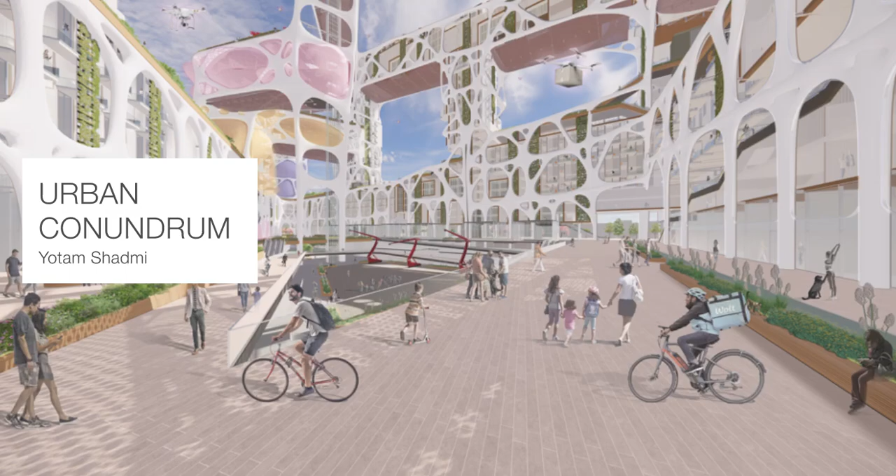When we think about the cities of the future, many of us envision utopian or dystopian scenes, visions where anything imaginable can come to life.

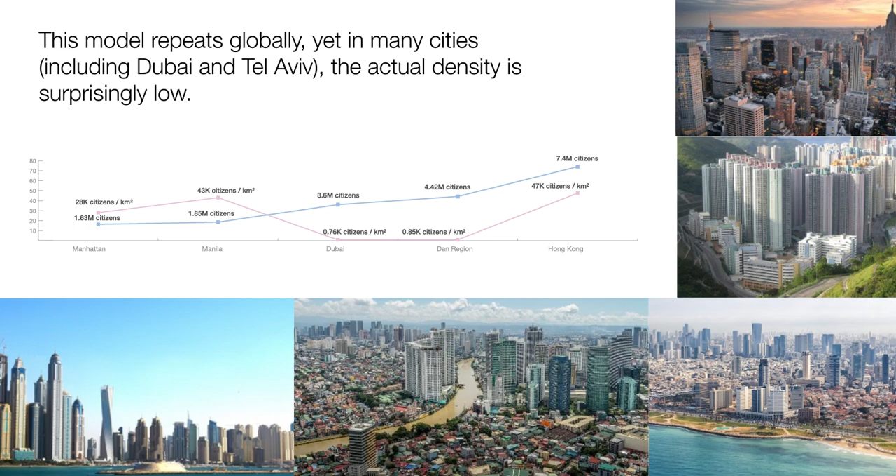Ultimately, we see how skyscrapers are built solely connected to the ground floor to achieve high density. This model repeats globally, yet in many cities, including Dubai and Tel Aviv, the actual density is surprisingly low.

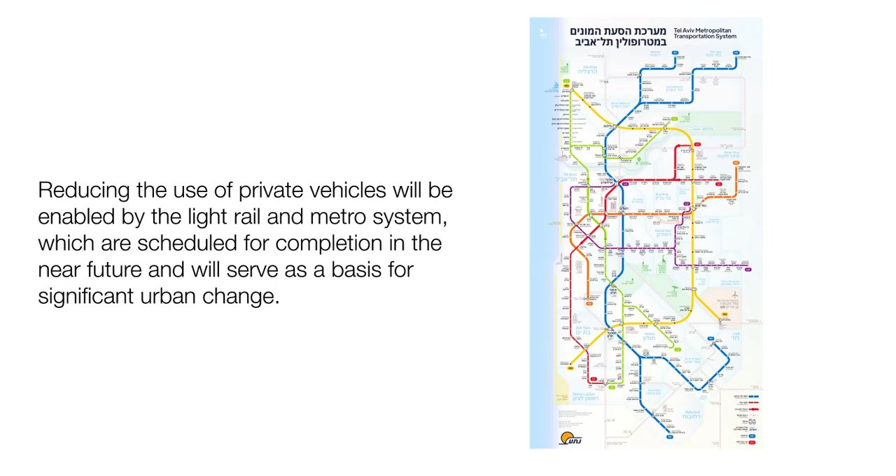Reducing the use of private vehicles will be enabled by the light rail and metro system, which are scheduled for completion in the near future and will serve as a basis for significant urban change. In central Tel Aviv, the highest concentration of stations will be built, through which 4 out of 6 metro and light rail lines will pass.

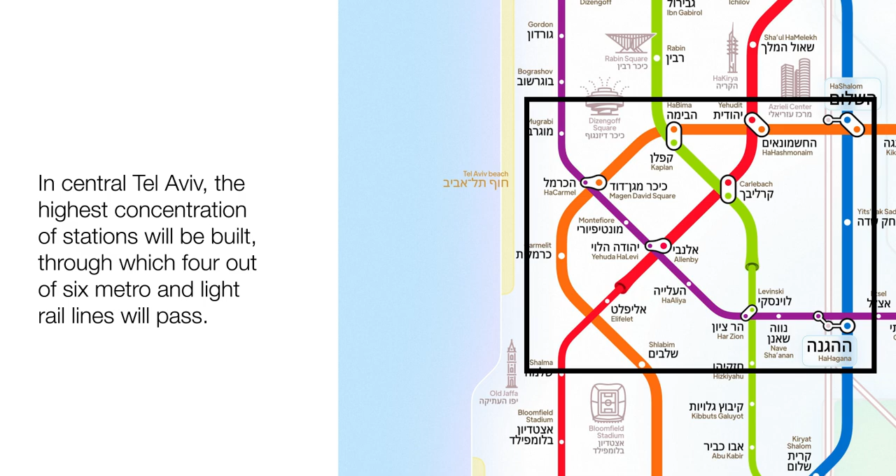The new train system brings up questions about the relationship between the city's ground and underground levels, and the amount of underground parking that currently exists.

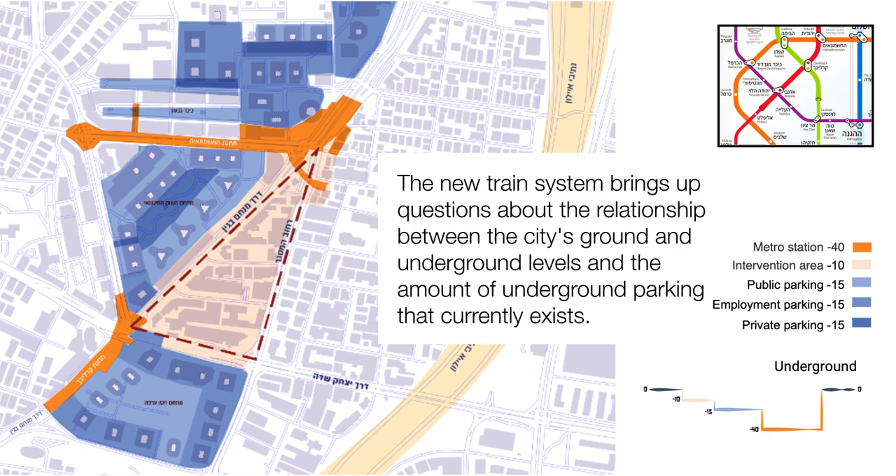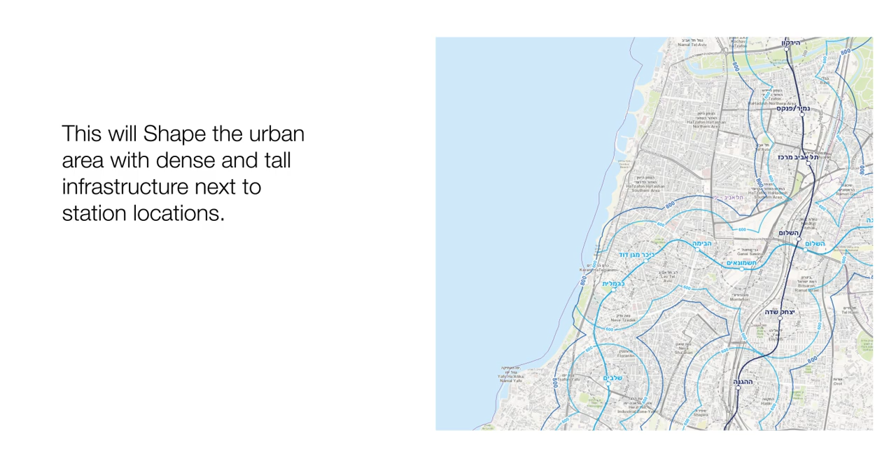According to a national master plan, the quantity and height of constructed mass throughout the city are undergoing significant changes. This will shape the urban area with dense and tall infrastructure next to station locations.

It is suitable for architectural experimentation because it meets 3 central components: proximity to urban centers, high concentration of accessible public transportation, and being up for significant changes in its building volumes.

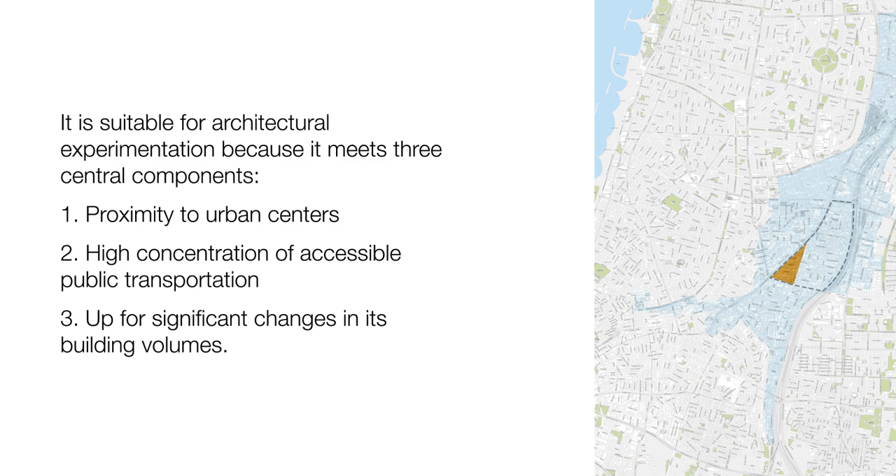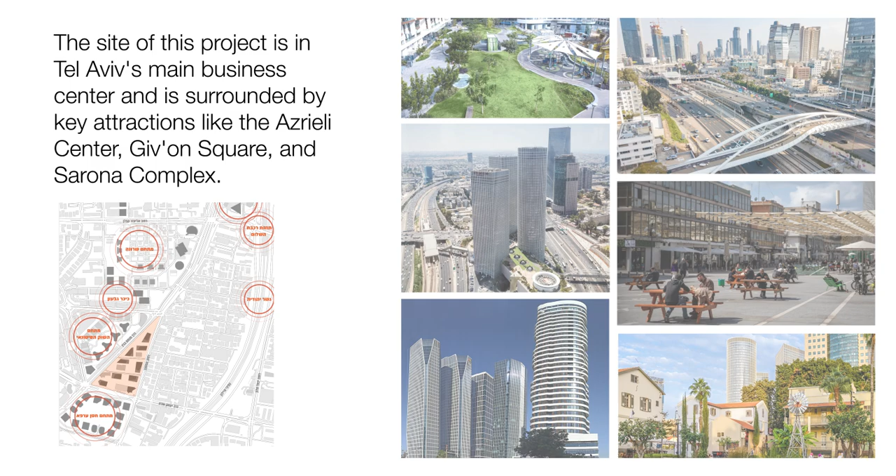The site of this project is in Tel Aviv's main business center and is surrounded by key attractions like the Azrieli Center, Giv'on Square, and Sarona Complex. It is also planned to be highly accessible by various public transportation means with very high frequency.

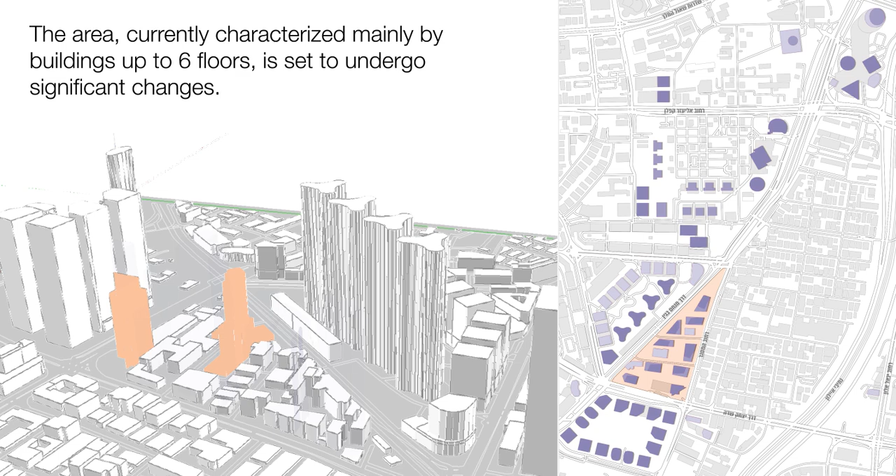The area, currently characterized mainly by buildings up to 6 floors, is set to undergo significant changes, to a construction height of between 20 to 40 floors and multiplying its building volumes by 5. Approximately 3,000 people are expected to pass through it per peak hour.

These factors provide an opportunity to create a different urban model. Now, let's try to think about public space differently, somewhat like the futuristic movies we saw at the beginning.

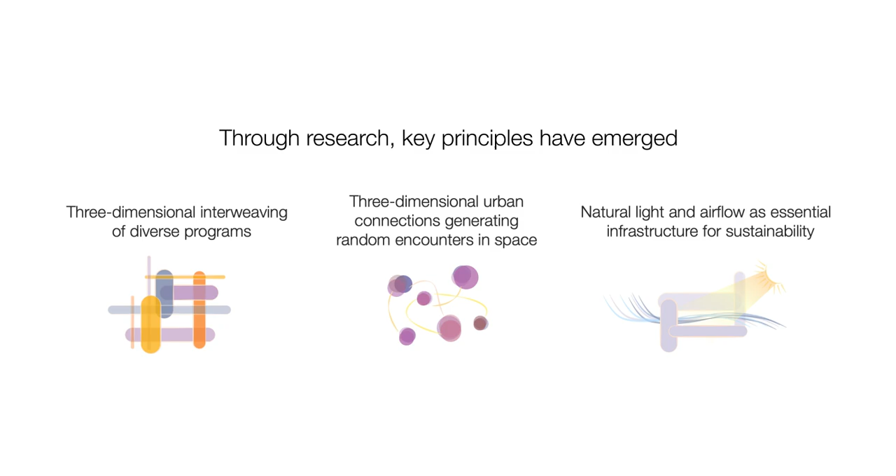Through research, key principles have emerged: 3-dimensional interweaving of diverse programs, 3-dimensional urban connections generating random encounters in space, and natural light and airflow as essential infrastructure for sustainability. These principles aim to create a vibrant urban environment that enhances both functionality and human experience sustainably.

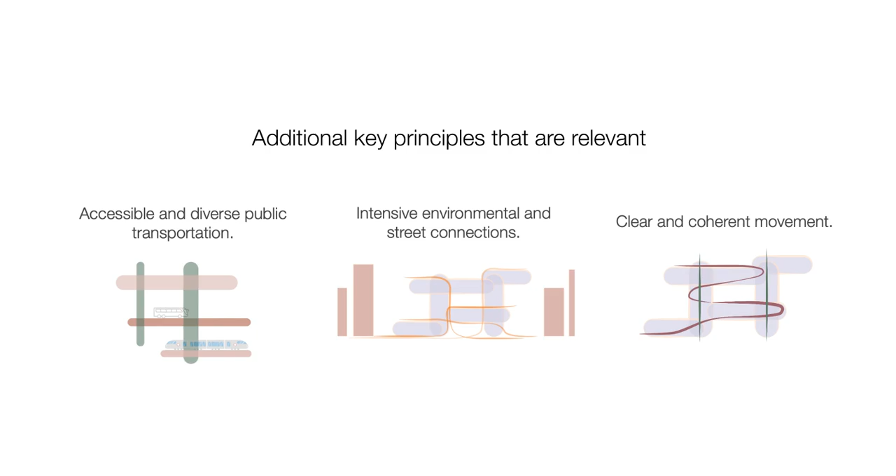Additional key principles that are relevant are accessible, diverse public transportation, intensive environmental and street connections, and clear and coherent movement. The project aims to integrate multi-layered public spaces beyond street level, accompanied by diverse public services, while maintaining a high density that considers all these criteria.

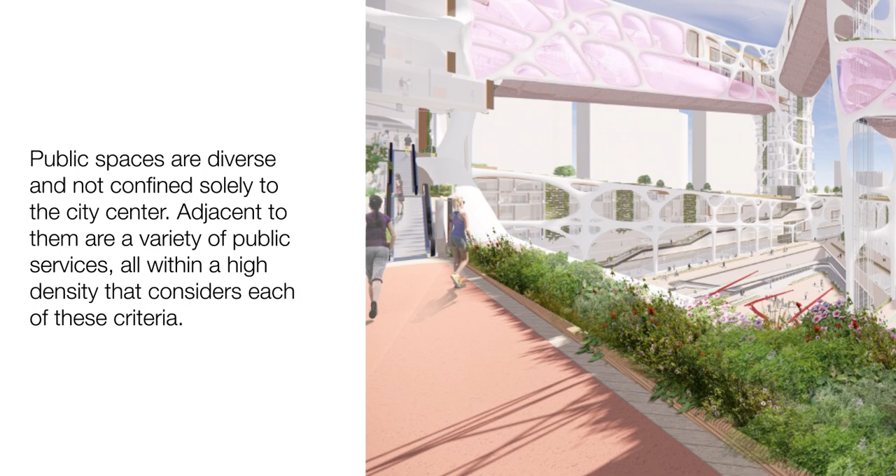Public space key principles are layering of public space, diversity of public spaces, and high-density development while preserving public spaces for all. Public spaces are diverse and not confined solely to the city center. Adjacent to them are a variety of public services, all within a high density that considers each of these criteria.

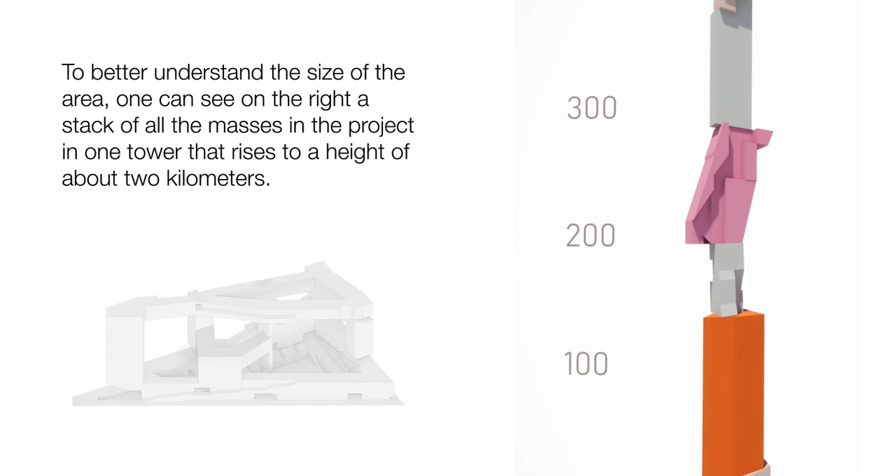To better understand the size of the area, one can see on the right a stack of all the masses in the project in one tower that rises to a height of about 2 kilometers.

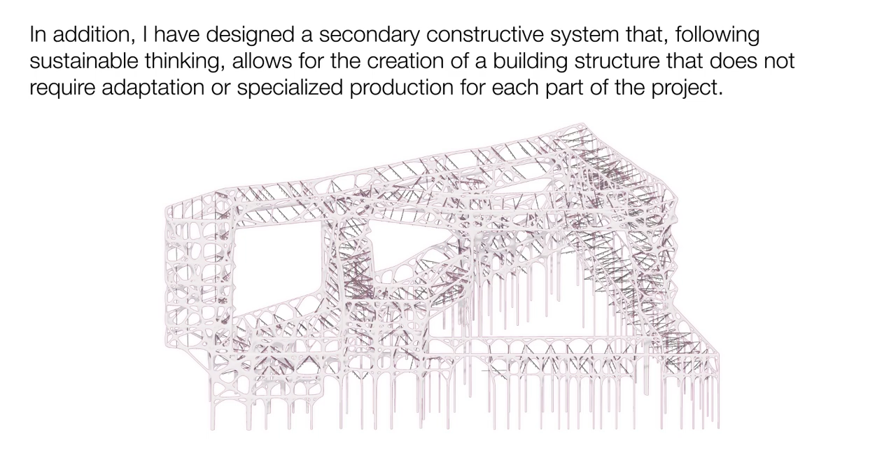Using a learning algorithm, the minimal constructive structure for the project has been found from an environmental aspect of reduced material usage. In addition, I have designed a secondary constructive system that, following sustainable thinking, allows for the creation of a building structure that does not require adaptation or specialized production for each part of the project.

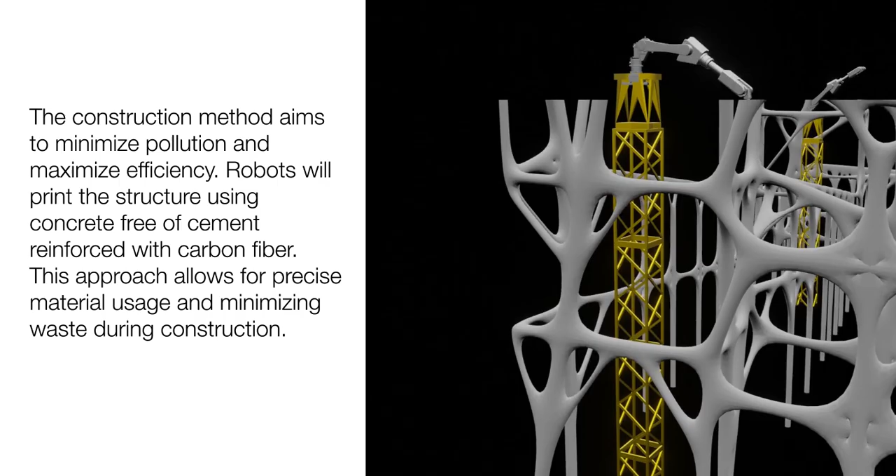The construction method aims to minimize pollution and maximize efficiency. Robots will print the structure using concrete free of cement, reinforced with carbon fiber. This approach allows for precise material usage and minimizing waste during construction.

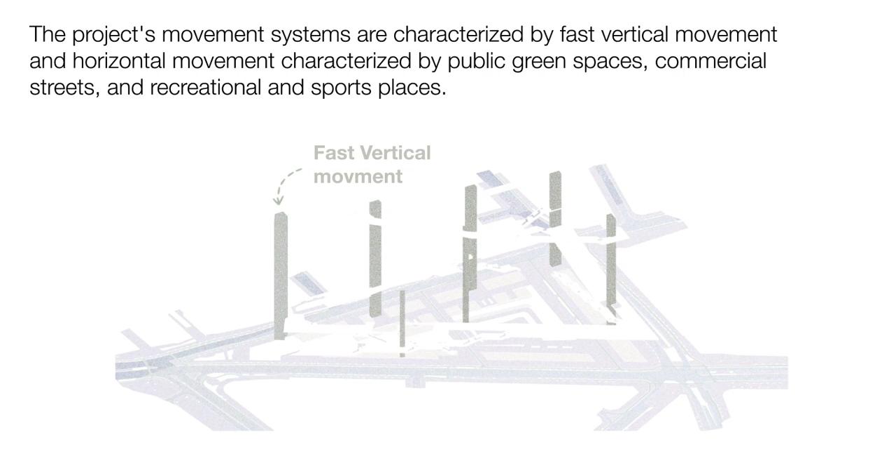The project will integrate movement from the city ground and underground to internal movement systems. The project's movement systems are characterized by fast vertical movement and horizontal movement, characterized by public green spaces, commercial streets, and recreational and sports places.

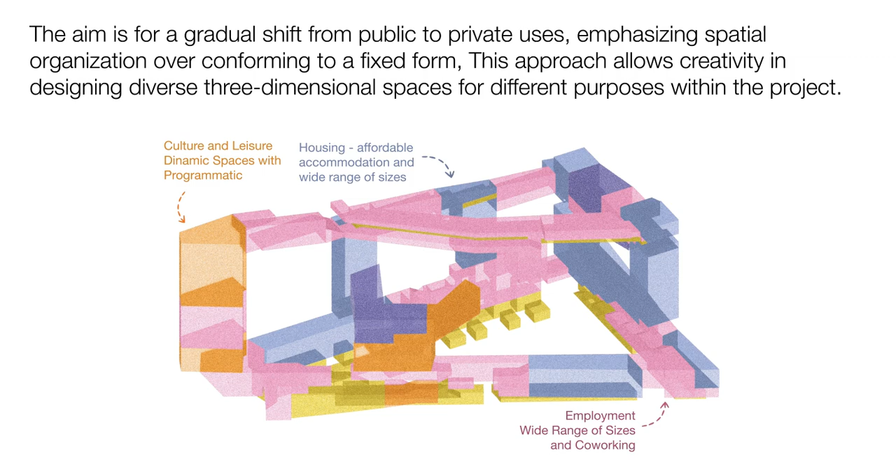The aim is for a gradual shift from public to private uses, emphasizing spatial organization over conforming to a fixed form. This approach allows creativity in designing diverse 3-dimensional spaces for different purposes within the project. I prioritize creating a sustainable space in its construction methods and daily functionality.

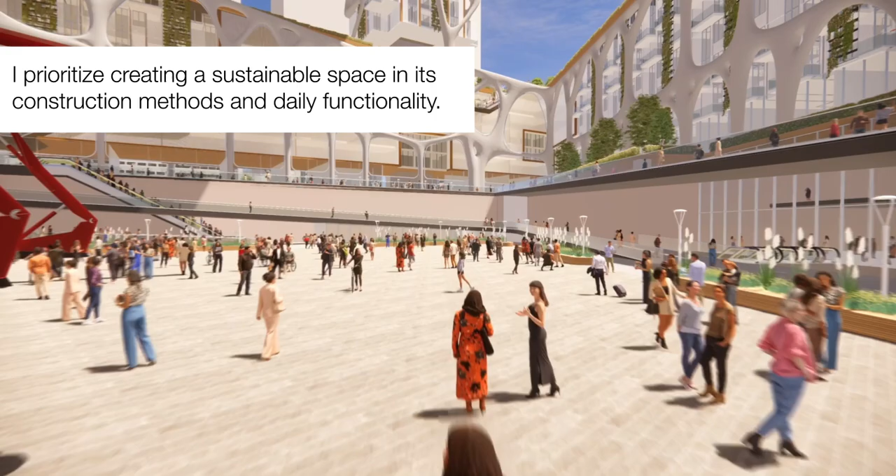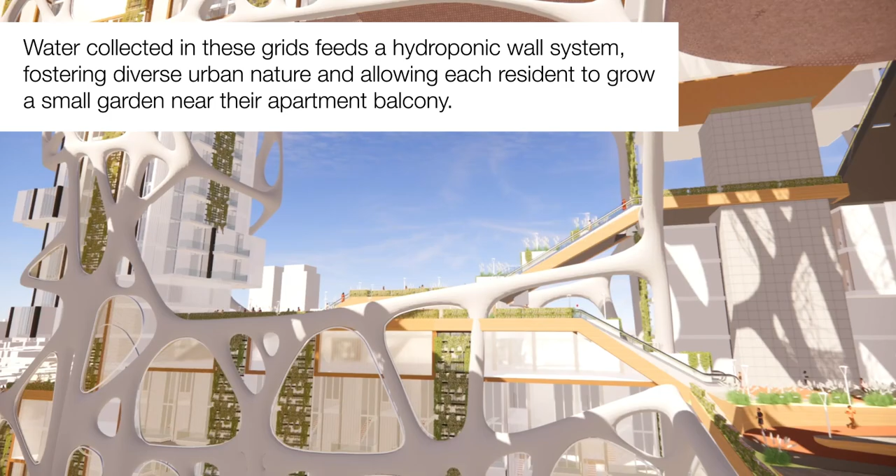On the southern facade and rooftops, solar panels are integrated. On the western and northern facades, three-dimensional woven grids cool down at night and in the humid morning air. Water collected in these grids feeds a hydroponic wall system, fostering diverse urban nature and allowing each resident to grow a small garden near their apartment balcony.

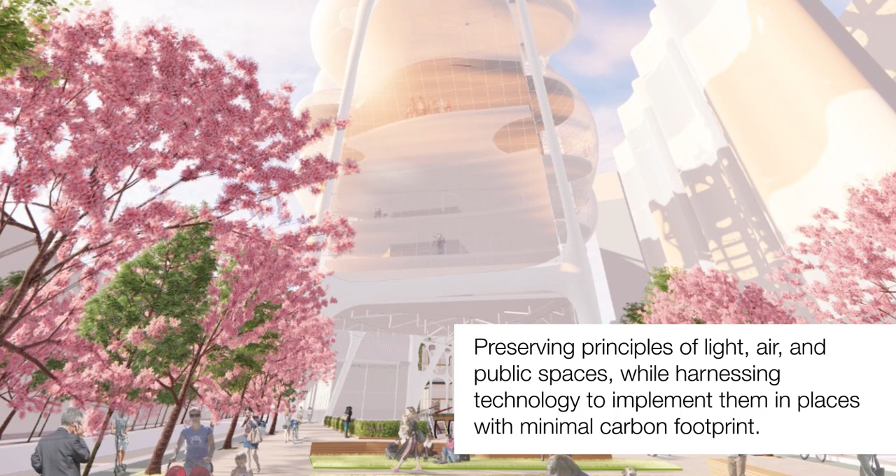In an era of climate change and widespread urban congestion, the need to rethink urban spatial perception is crucial. Preserving principles of light, air, and public spaces, while harnessing technology to implement them in places with minimal carbon footprint. This is in order to preserve urban spaces that will benefit their residents.